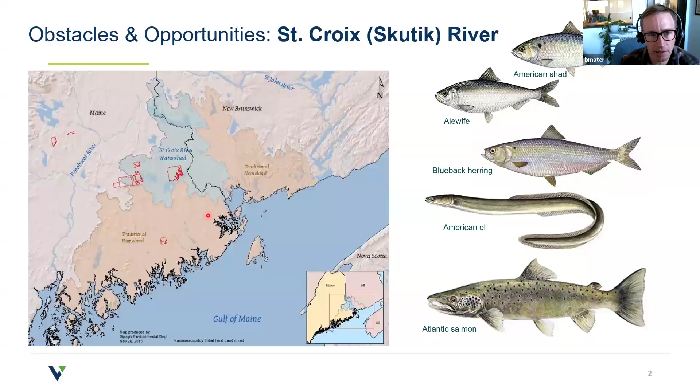But it's not just river herring. Historically, this river has seen very large runs of Atlantic salmon. We have American eel and American shad as well. Not only is it ecologically important, but it's also culturally important to the Passamaquoddy people. And I like this image here because it shows the traditional homeland of the Passamaquoddy people, and you can see that the watershed sits squarely in the middle of that traditional homeland.

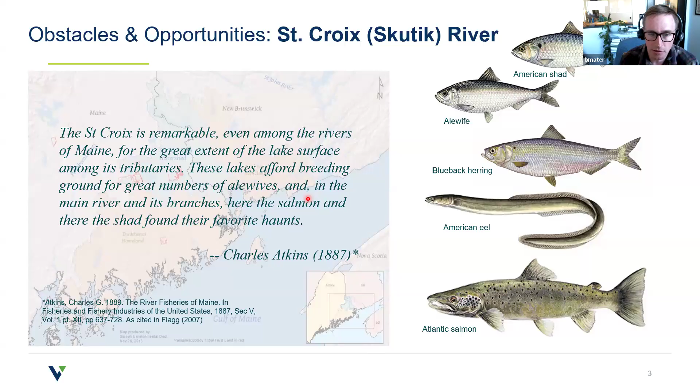So these very large runs of sea-run fish really existed up into the 1800s. And I like this quote from the 1880s that sums it up nicely, talking about the uniqueness of the St. Croix: "The St. Croix is remarkable, even among the rivers of Maine, for the great extent of the lake surface among its tributaries. These lakes afford breeding ground for great numbers of alewives, river herring, and in the main river and its branches, here the salmon and there the shad found their favorite haunts." And those large runs came to an abrupt end, all but stopping in the early to mid 1800s with the construction of dams on the lower reach of this river.

So presently, there's three main hurdles highlighted in this map of the watershed. We have the downstream-most one, which is the Milltown Dam, shown in this lower right image, that was recently removed. Mike will be talking about that one. The next one up is a hydroelectric dam owned by Woodland Pulp. That's the Woodland Dam that Greg will be talking about. And then I'll be wrapping things up with a discussion of ongoing design work at the Grand Falls Dam, which is shown in this upper right image.

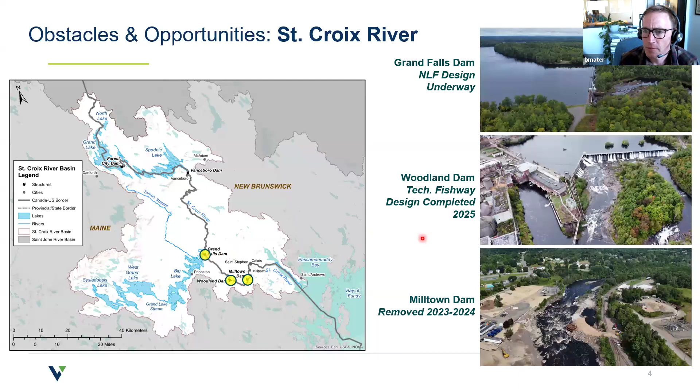And one thing I want to point out here, I talked about the interrelatedness of these dams. It's really because 98% of that spawning habitat for the river herring lies upstream of the Grand Falls Dam. Okay, with that, I'll turn it over to Mike to talk about Milltown.

All right, thanks, Ben. Thanks everybody for having us along today to talk about these great projects, all very unique amongst themselves. I think we could all spend a few hours talking about each one of these projects. So this is going to be a rapid cruise through them, but I think it will also be informative and give folks a good orientation to the efforts on the St. Croix.

I wanted to do some initial acknowledgments in addition to Ben and Greg and the Joint Committee for having us along, in particular acknowledging New Brunswick Power, the Peskotomuhkati Recognition Group, Department of Fisheries and Oceans, and our teaming partner GHD Limited out of Fredericton, as well as other really important players in this project, including Dillon Consulting and Kleinschmidt, who handled the permitting on both sides of the border, and Pennecon and Sargent, the constructors who did all the heavy lifting to carry this project across the finish line.

So you see, again, a familiar graphic. Let's see, click, there we go. Familiar graphic over here, but you see Milltown is the first main stem barrier above Passamaquoddy Bay. You're getting into the lower St. Croix.

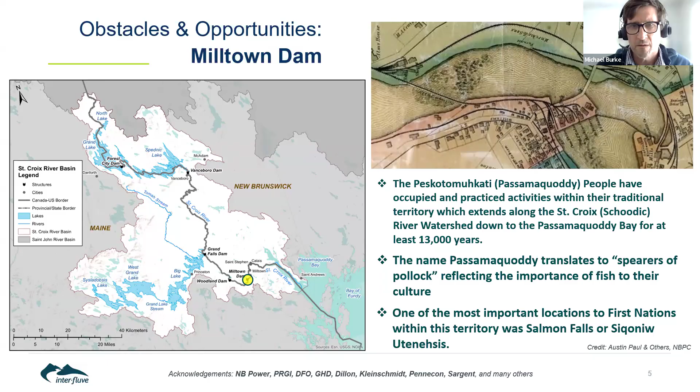Okay, here we go. So moving forward in time, early development of various water control structures here in the late 1700s and into the early 1800s. Really the first one that obscured a significant portion of the river channel was in 1825 and included no organized fishway. And in the black and white photo here, you see a late 1800s, early 1900s image with the Canadian Cottons mill over there at the right, and this follows shortly after the first generating station was constructed here in 1881.

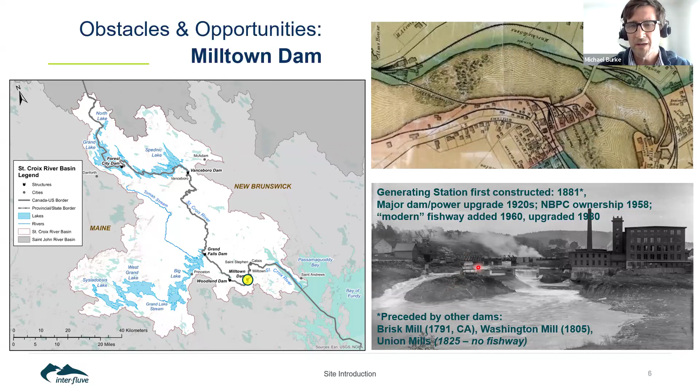And as you'll see, ongoing major upgrades occurred over the next century. But really the first major dam and power upgrade following the initiation of the generating station was in the 1920s, when additional powerhouses were constructed across the river and additional spillways over here on the United States side of the river. New Brunswick Power took ownership of the site in 1958, with a modern, quote-unquote, fishway added in 1960, upgraded in the 80s and multiple times since then on through the 2010s.

So we'll just fast forward with some quick snips to see what the site looked like up until a few years ago. In this image, the cotton mill is no longer here on the Canadian side of the river, but the original powerhouse is still here. And then two additional powerhouses were added, like I mentioned, in the 1920s, as well as a concrete stop log spillway, a rollover spillway, and a gatehouse, all succeeding those 1920s upgrades. And so this was how the site looked from downstream as of 2022, and operating head was about 8 meters at the site.

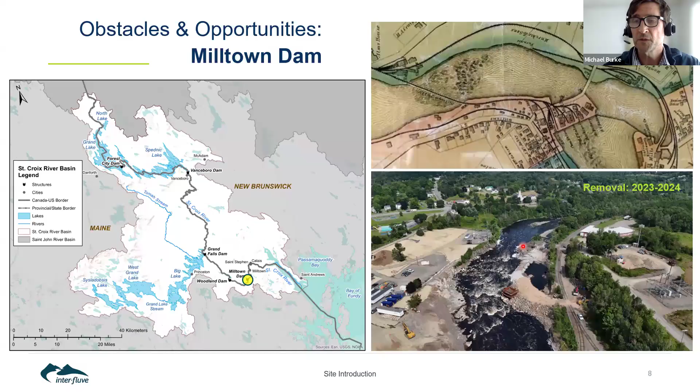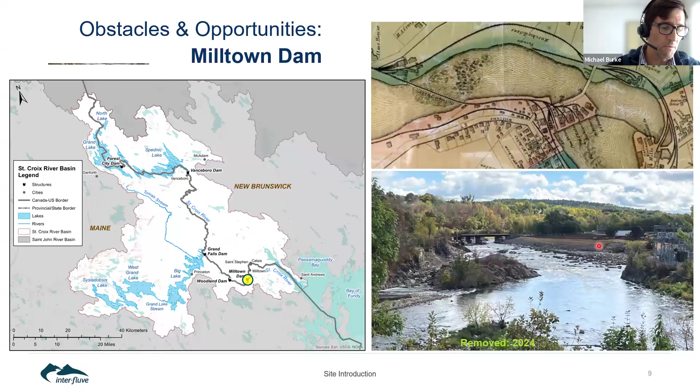So we fast forward to the removal process, stretched out over 2023 and 2024 after focused planning and permitting from 2019 on through early 2023. And these are just a little bit of foreshadowing of additional things we'll see moving forward through the presentation. And lastly, just a graphical snip here of what we look like today, or very similar to what we look like today, from that same vantage point, looking up at the formerly dammed location.

So what made this project happen? What were the motivations and the opportunities and the decision factors that really made it come to fruition? First of all, the motivation was a longstanding interest in removal of this site by First Nations and Passamaquoddy people, as well as many dedicated other collaborators on both sides of the border, really looking towards the ecological restoration of the river.

But then in conjunction with that, developments came along that further enabled the feasibility: New Brunswick Power was entering into final arrangements for their new Fisheries Act authorization, and discussions around offsite mitigation credits had been identified. And then the last trigger point, if you will, was that this site in its present condition in 2022 generated about 2.7 megawatts of power and was in need of significant upgrades and modernization.

And the final trigger point was that the cost analysis came down that it was going to be a much less expensive project to remove the dam and use it as mitigation for the Fisheries Act authorization than it was going to be to modernize and bring the facility to a more productive and economically viable state.

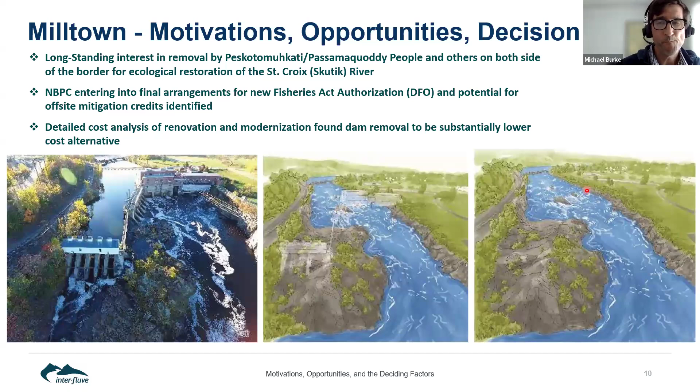So just to add some site context, as we mentioned, the former facility is here in the center of the screen. This particular imagery is actually during a facility drawdown. And so you see the impoundment area, which extended up to the base of upper cascades, was drawn down, and some marginal surfaces are exposed.

The site is just above the head of tide; highest astronomical tide presently maps out about the location of this line, and a fairly steep channel downstream until things start to bottom out closer to the town of St. Stephen. Just some additional features.

So we've got the Milltown neighborhood of St. Stephen here on river left, town of Calais, Maine on river right, and we've got a once a day, twice a day used rail trestle right upstream of the dam. The former Canadian cotton site here on river left, just upstream of the dam.

And one of the significant features also that I'll point out is that the international boundary snakes, I'm just showing a segment here, right through the facility and right through the project site. And conveniently it actually sliced right through, not physically, but virtually, one of the operating units in the dam. So as you can appreciate, that added some complexities to the overall implementation of the project.

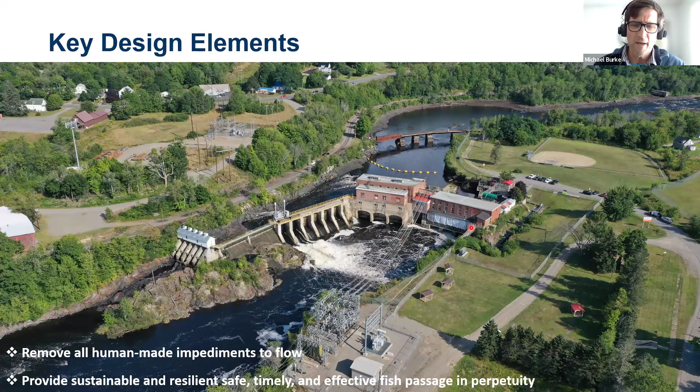And then the second was to provide sustainable and resilient, safe, timely, and effective fish passage in perpetuity for the native sea-run fish community. And that last one actually did have quite a bit of influence on the ultimate design solution, because this was a key mitigation piece for NB Power and DFO. There really did have to be some pretty significant assurances of safe, timely, and effective passage, essentially on day one.

So taking those guideposts forward, I'll then highlight some of the design elements that responded to that. And this is essentially right after the completion of construction during demobilization photo here. And so I've ghosted in the general alignment of the powerhouses, the spillways, and the gatehouse here. And I'll just highlight a few things.

I'll just get right into thinking about the day one necessity to provide safe, timely, and effective passage. It was ultimately concluded that there was too much risk in not being able to ensure passage on day one of performance, so there was some proactive bed enhancement done in the tail race area, so the area downstream of the white line, and really going over to the U.S. shoreline in the zone that I'm circling with the pointer here. This was the area where it was anticipated that there could be a substantial multi-meter vertical discontinuity, and that was just too much risk to wait until the end of construction for. So proactively planned bed enhancement in the form of essentially a bank-to-bank nature-like fishway.

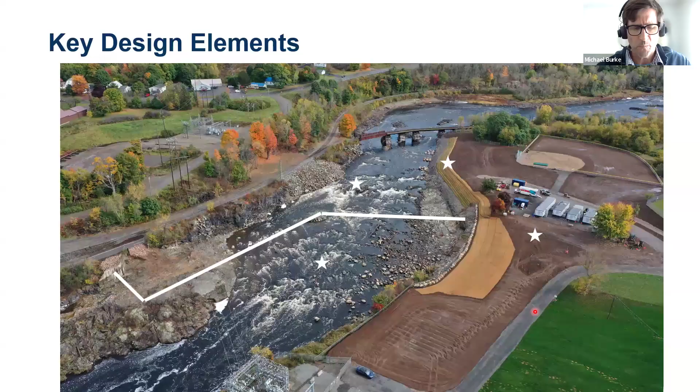And then this former Canadian cotton mill site was a controlled site, had, as you can imagine, industrial legacy soils, and in addition, previously were retained by a vertical retaining wall that was 10 feet above the water and was going to turn into about 25 feet above the riverbed. And so that cribbing was removed, and the bank sloped with heavy toe protection, and then a bank restoration component above that, and overall overbank restoration that will eventually be turned over from NB Power to others.

So some of the novel implementation challenges of this site, and just a quick orientation to the imagery here. I pointed out the upper cascades above the impoundment, and I'll just trace out about the head of the impoundment here with the laser pointer. This is about as far as the backwater extended up. And so this is the next section of passage upstream of the Milltown site.

So some of the challenges that were navigated successfully, including the fact that the international boundary not only split the site, but split a generating unit. And we actually somehow, although it was never written thus, were able to temporarily virtually move the international boundary to a more logical separation of work between work in Canada and the United States. So that was an extraordinary win that really enabled the project to proceed. Other things, as you can imagine, going through permitting in not one but two countries, thinking about sequencing construction and licensing and things like that in two countries.

And then really some of what I referred to before, thinking about what can be reconstructed of the underlying bedrock, and thinking about the stakes for passage and what can be known, what is really unknowable until you open the site up, and putting measures in place to be able to both have enough assurance, but then also be able to capitalize on the opportunities that do emerge through that discovery process to really optimize the finished project.

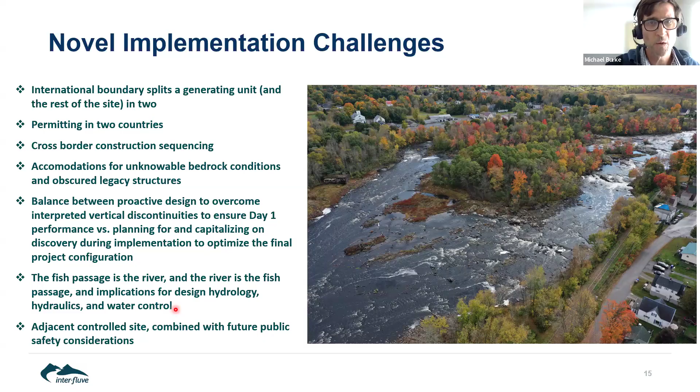So lastly, I'll just wrap it up here with a couple of final outcomes and feedback observed since the construction of the project. So first of all, the project was implemented safely and successfully. It has been passing a lot of fish thus far. The Woodland counts can no longer be done at the Milltown site, so the count is now done up at the next upstream site, and that has increased about 2.5-fold in the first year, when the project was really only half constructed at that point. So the future looks bright.

There is a multi-year effectiveness monitoring program being led by PRGI, or the Peskotomuhkati Recognition Group, and Canadian Rivers Institute, which is in support of NB Power's adaptive management program. And due to the historical nature of it not being a smooth site to pass anyway, and being pretty opportunistic passage historically, the target was set at a 65% passage per 24-hour target in year 0.5.

So between the first construction seasons, the result was about 78% effectiveness within that 24-hour window, and data from this past year is being crunched at the present time. To me, I will just say this was an extraordinarily rewarding example of the cooperation across the border, signified by this old postcard I found in an antique shop a couple of years ago. I guess this is actually kind of an annual event there between Calais and St. Stephen. So that was great.

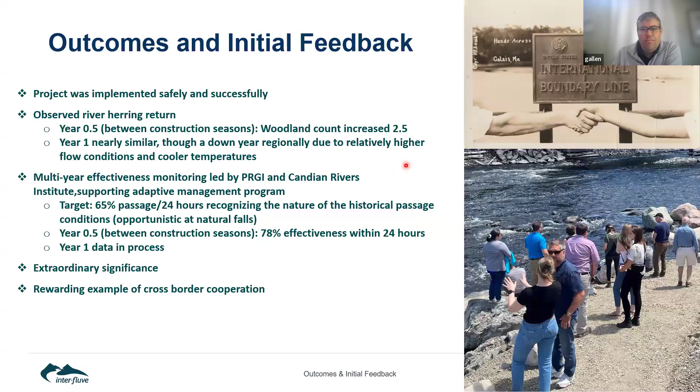All right, I think I have control. Just trying to advance the screen. Oh, did it go? All right. All right. Yeah. Thanks, Mike.

Yeah. So as the fish move upstream, Milltown is now removed for the past 2 years. They hit the Woodland Dam, and so this is the next dam upstream. You can see in the upper right, it was built in roughly 1905. That's a colorized historic photo there. You can see log sluices right just off to the right, and the powerhouse to the left, and the tail race, and then the dam in the upper right.

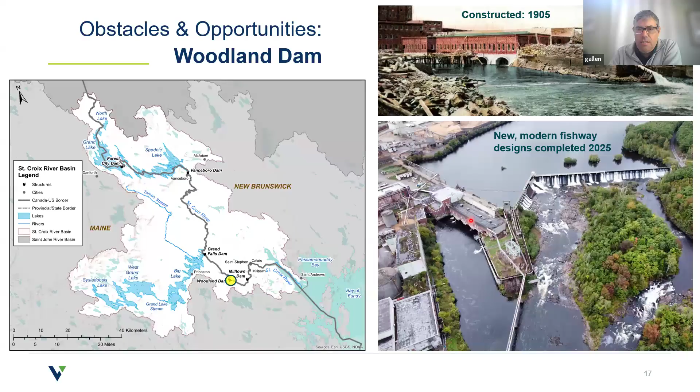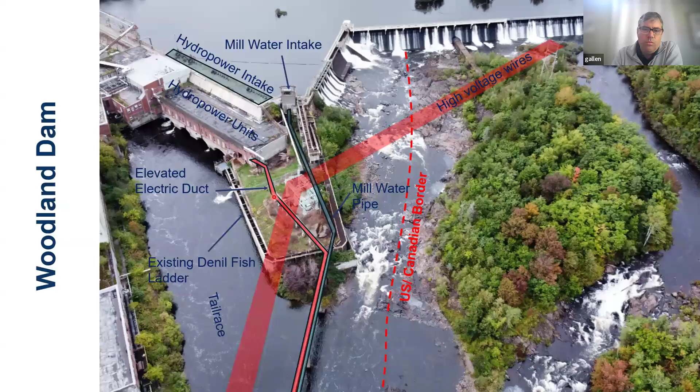There's an existing ladder that wraps around what we call this area here, an island. The only way to get access to it is through the powerhouse here. It wraps around the island, a couple switchbacks up to the head pond. There's an elevated electrical duct. This is a feed to the entire paper mill. And so that's something that we need to be aware of. And there's also some overhead wires that cross the channel. You can see them there. And they cross from the Canadian side and then move on to the US side.

So that existing fishway that was built in the 1960s, it's a Denil ladder. It's roughly 49 feet of head, and it's over 700 feet long. It's reached the end of its useful life, really. It's in poor shape. It did pass over 1 million fish back in 1986. And with the last 2 years with Milltown out, the counts have been up around 600,000. So that's really promising, and that's impressive for a Denil ladder. Although the effectiveness studies show that it's about 30% efficient in terms of getting herring upstream from the tailwater here up to the head pond.

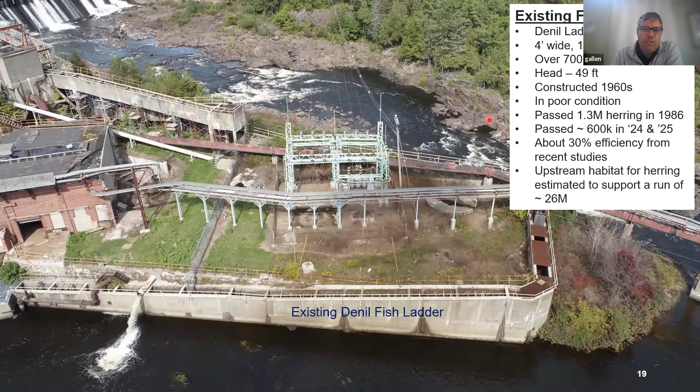The amount of habitat upstream, as Ben had mentioned, it's in excess of 26 million. That's Maine DMR's estimate of the potential run size. I know DFO's estimate is greater than like 60 million. So there's a lot of potential here at this site in terms of potential run size for alewives.

There's a downstream passage here as well. It went too far there. Sorry. Downstream passage. So there's a bypass in the middle of the existing intake racks for the hydropower station, and that transitions to a 24-inch diameter pipe that discharges to the tail race. The approach velocities to the intake are really low. They're at 0.7 feet per second. So that's good news when we look at, say, new designs to improve fish passage at this site.

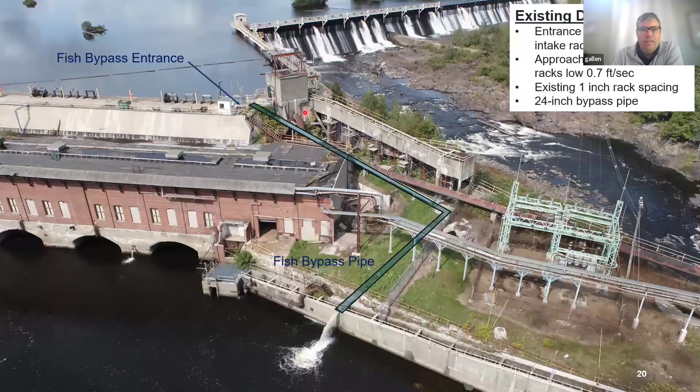And so the site constraints: it's an operating mill. There's no vehicle access to this island area. And there's some critical infrastructure that, as we design new fishways, we need to avoid. So there's this mill water intake that's critical to the paper mill's operation. There's this elevated electrical duct that's also critical. That's the main feed to the paper mill as well.

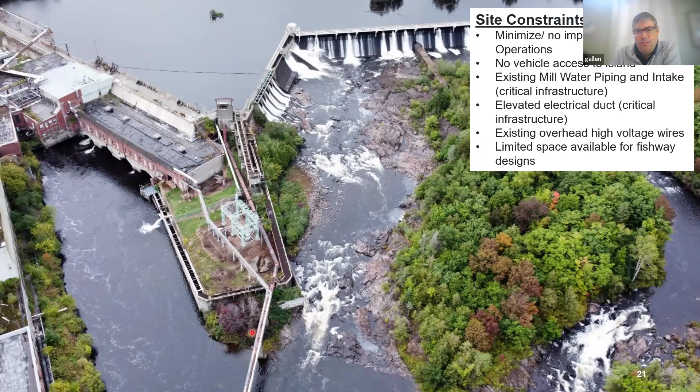And then there's the overhead wires that cross the site. So those present some challenges as we look at options for fishway designs. And so some of the design tools that we used going into this, in terms of surveying, we had some LiDAR surveys done. This is an image showing that LiDAR survey, because it's really important to know where everything is in three dimensions as we lay out our new designs. We used 3D models and computational fluid dynamic hydraulic modeling extensively as we moved forward with designs.

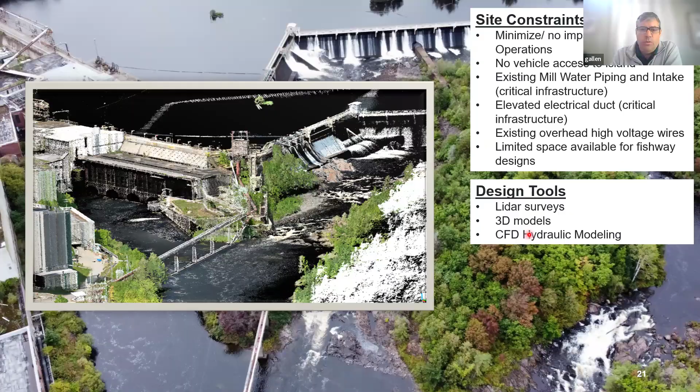Okay, so in terms of what's proposed, here in the lower right you can see we have an access bridge. And so that's important for long-term maintenance of the fishways as well as construction access. What we've designed is a fish lift. And so that fish lift has an entrance in the general location of the existing Denil ladder entrance.

And so as fish move upstream, they would enter the fishway channel. They would be trapped over the hopper. The hopper would pick them up, and then they would be discharged into an exit flume and swim out to the head pond. In addition to that, we had designed a fish ladder. This is a pool and chute fishway with an entrance adjacent to the spillway channel. And so that runs upstream with some switchbacks and meets up with the exit channel to the fish lift.

Then for downstream passage, we're replacing the existing trash racks on the hydro intakes with 3/4-inch clear space trash racks. That would exclude eels, herring, and other fish from the intake. And then we have some bypasses. There's two bypasses there. They go through the dam into a flume, and then that transitions to a pipe and then discharges adjacent to the fish ladder.

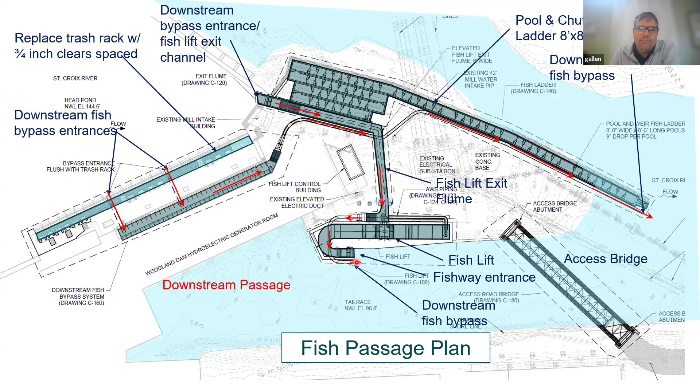In addition to that, the fish lift exit flume also acts as a downstream passage route. And so fish would travel down that flume, and at the end there's a weir, and that transitions to a pipe and then discharges adjacent to the fish lift entrance. And so these are some images of some of the models put together as part of the design process. You can see the fish lift there on the left.

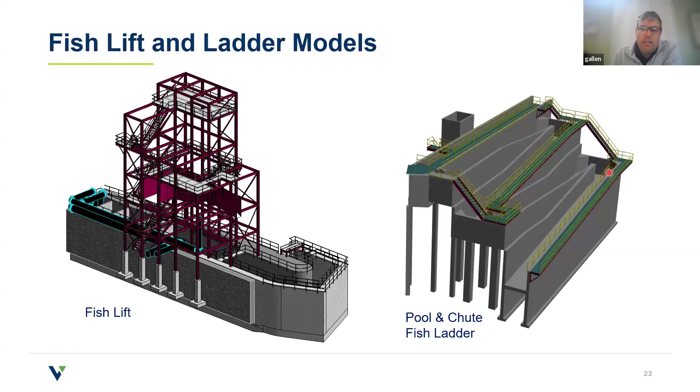This was a 3D Revit model that really helped us pull together the CAD drawings as well as the structural analysis. And it also provides a good visual of what the fish lift looks like. You can see the steel superstructure that supports the hoist that lifts the hopper up to discharge the fish into the exit channel. And to the right there is an image of the elevated portions of the pool and chute fish ladder. And so that was important as we tried to avoid all the various infrastructure on this site.

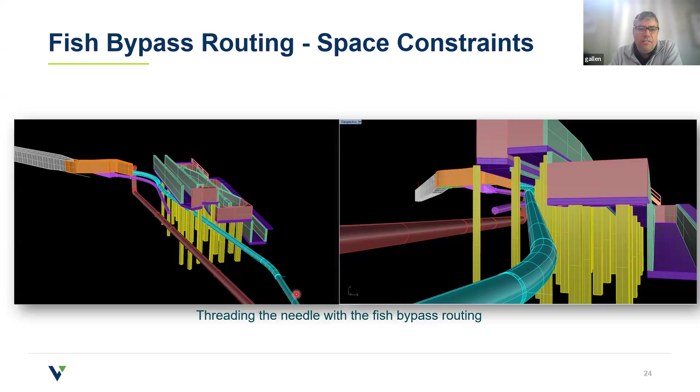Then we have to dive and get below our proposed fish ladder here. We had to miss the supports. We had to make sure that the pipe has enough clearance to miss the overhead wires. And in addition to all that, we had to make sure that the hydraulic conditions within the pipe are good: that we have enough water depth, low enough velocity, that we don't have any hydraulic jumps within the pipe. And this image just shows that flume as it transitions to a pipe.

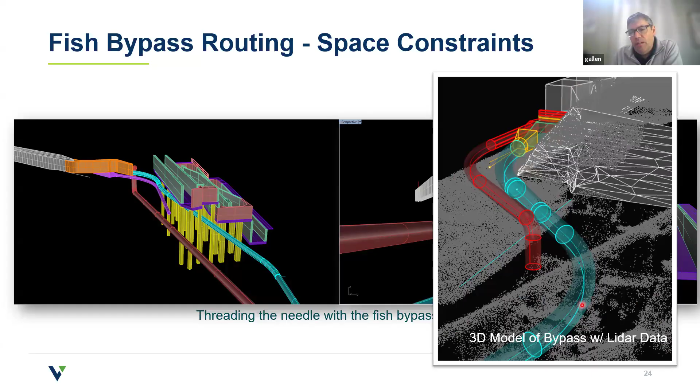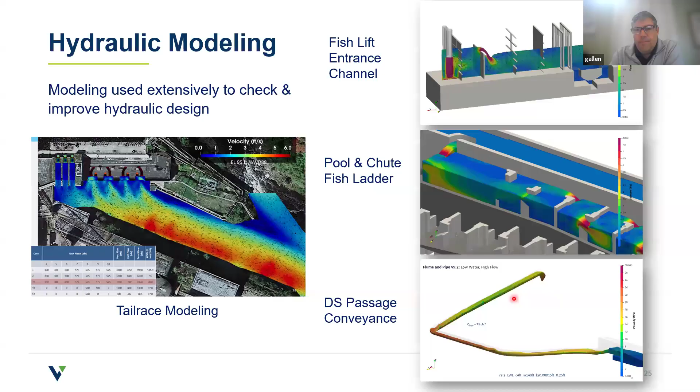And there were a lot of folks involved in this, a lot of collaboration. This project was led by Maine DMR, Department of Marine Resources. We had really good cooperation with the owner, as well as all the other stakeholders. NOAA provided quite a bit of funding for this project, but there were other grants involved as well.

Thanks, Greg. Yeah, so this will be a sneak peek of what's going on at Grand Falls currently. We're a little past 30% design up there, and we're running a little bit short on our presentation time, so this will be kind of a high-level overview of what's going on. So much different site. I mean, drastically different than Woodland in terms of just the existing infrastructure.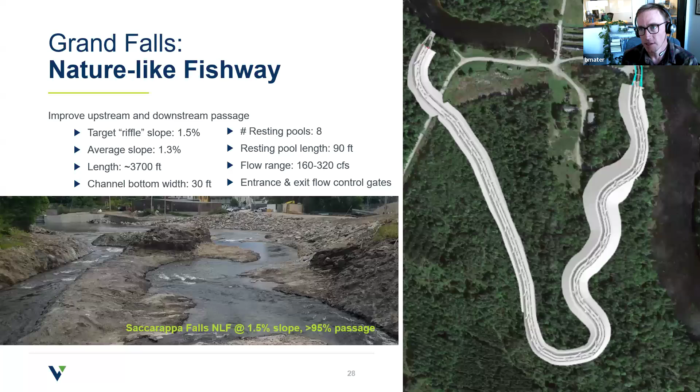Given that slope and that head, we're currently sitting at a pretty long nature-like fishway, 3,700 feet, which would be one of the longest in the world. Channel bottom width of 30 feet, roughly 8 resting pools, and a capacity of 160 to 320 CFS, which is at 5 to 10% of the station capacity. Okay, so here's a rendering of what that would look like. So to orient you, here's the powerhouse. Here is the St. Croix River. There is our entrance channel, which transitions into that nature-like fishway.

Now, this is an interesting site because it looks forested, it looks nice. But there have been lots of legacy impacts here. Obviously, logging. Another big impact was with this excavated power canal. In the image I showed, they put that material on rail cars, ran it down this hillside, and side dumped it over here. We were pulling out cut lumber down 13, 14 feet deep on this hillside. So the nature-like fishway, we would kind of square up and cut right into that hillside. So there's a big geotechnical component to this project as well.

This cut here would be about a 30-foot deep cut. So quite a bit of excavation and earthwork. By the time we get up in here, the invert of the channel is about at grade, so we'd be constructing the banks as essentially levees before diving back into some more legacy fill up here. Here on the right is just another view of that.

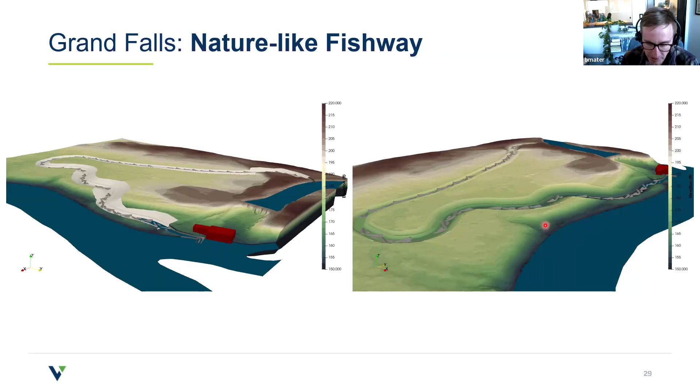All right, so you might have been asking, what are all those little gray structures in there? So those are our roughness elements, if you will. When we think about nature-like fishways, we often think of either kind of a pool drop type morphology, or maybe a rough rock ramp or boulder garden or something like that.

And I was trying to think about, is there a way that we can maximize depth and volume as you would with a pool weir type morphology, but then eliminate the potential velocity barrier that you get with that weir. At the other end of the spectrum, you could do a rock ramp where you no longer have discrete velocity barriers at weirs, but you might have shallow and pretty fast flow.

So the concept that I kind of developed, shown here in this sketch, flow would be moving from left to right in this particular image. And we'd have essentially a series of these angled alternating vanes where you have a rock vane that ties in on this bank at a high elevation. So we're looking down on the channel, and then it points upstream and dips down. So you have a low point on the vane where the flow comes across.

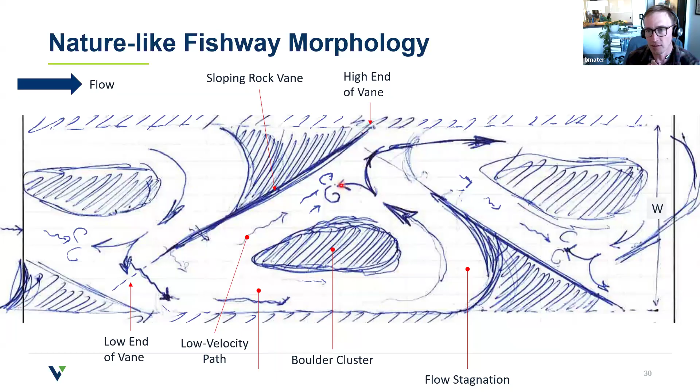And then it splits around a boulder cluster. You have a high velocity channel going this way and kind of a sneak route for the fish on this side. And you maybe even turn the flow back on itself to provide some extra resistance on that sneak channel. And then you just flip it on the next vane down. And this was kind of inspired by two things.

One is a Tesla valve. I don't know how many people on the call have heard of a Tesla valve, but it's essentially a check valve with no moving parts, often used in very small scale tube kinds of applications, where you take the flow, you split it, and you turn one lobe back on itself to provide resistance. So we want to provide resistance to slow that velocity and increase depth in our application. But this is an open channel.

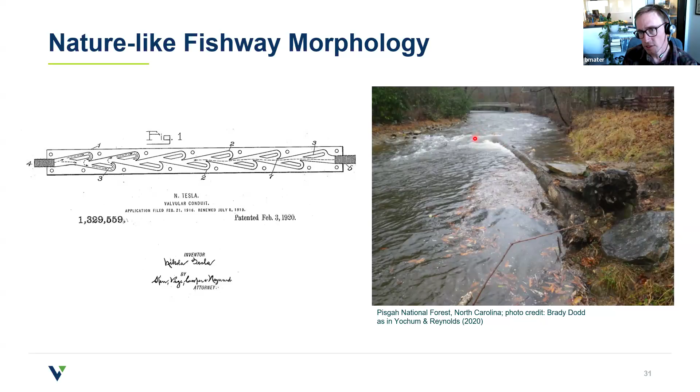So the other inspiration is, a common aspect of stream restoration is bank protection using log vanes. So this is a log vane shown on the right. The root wad is tied in at a relatively high elevation, points upstream, and then dips downstream. And so as the flow comes up, more and more of this vane is engaged, and you have the deep part over here, but then you're creating a nice stagnation region near the bank, slowing flow, and you no longer have a constant crest weir, but essentially a sloping crest weir. So you're maintaining good depth and flow conditions for the fish off the tip of the vane.

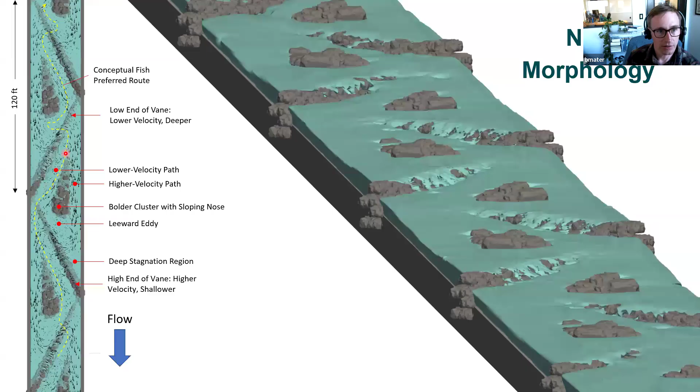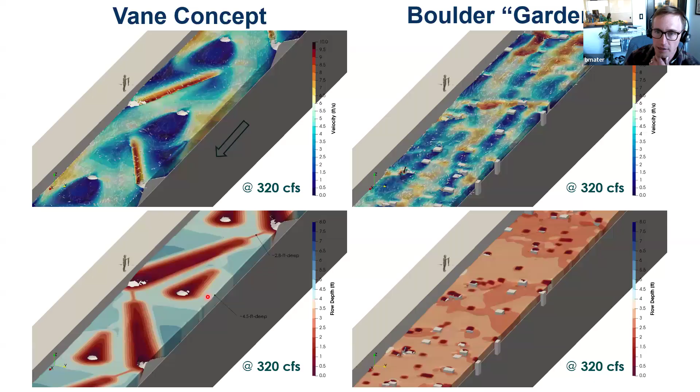So similar players in the collaboration at Grand Falls as down at Woodland. The Nature Conservancy is leading the design effort currently. We at Verdantas are leading the engineering design, and a lot of input from a lot of players.

So in summary here, we've talked about these three very different but very interrelated projects. As I mentioned, 98% of that spawning habitat is upstream of the third project, Grand Falls. So they're really tied together, but very different. And all these projects have ecological benefits, social and cultural benefits, as well as the economic benefits that we've discussed

throughout this presentation. So with that, the key takeaways: Milltown, Woodland, and Grand Falls are the three main barriers. We've checked off Milltown. It was a great success. Woodland, we have some pretty novel and state-of-the-art fishway designs, very technical. They're currently out to bid with targeted construction in 2028.

And then Grand Falls is a very long fishway with, I think we were at roughly 130,000 cubic yards of excavation up there with a novel morphology. There's also downstream bypasses underway at Grand Falls as well. And that would be the last hurdle to unlocking all that great spawning habitat further up in the watershed.